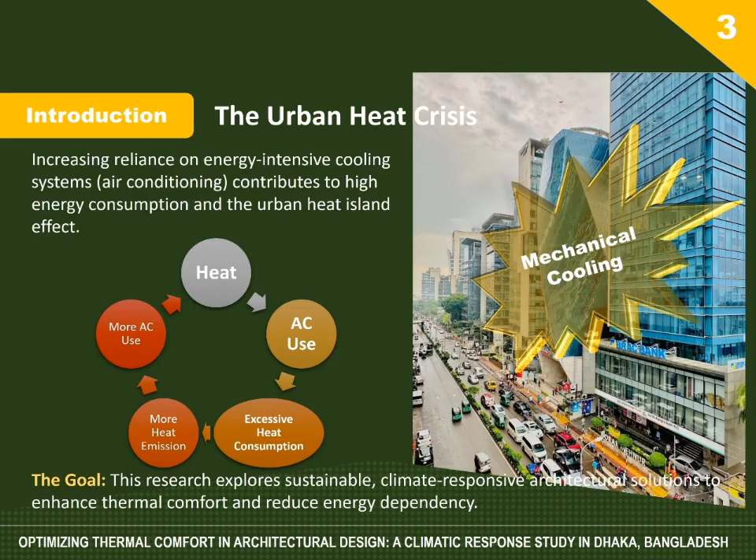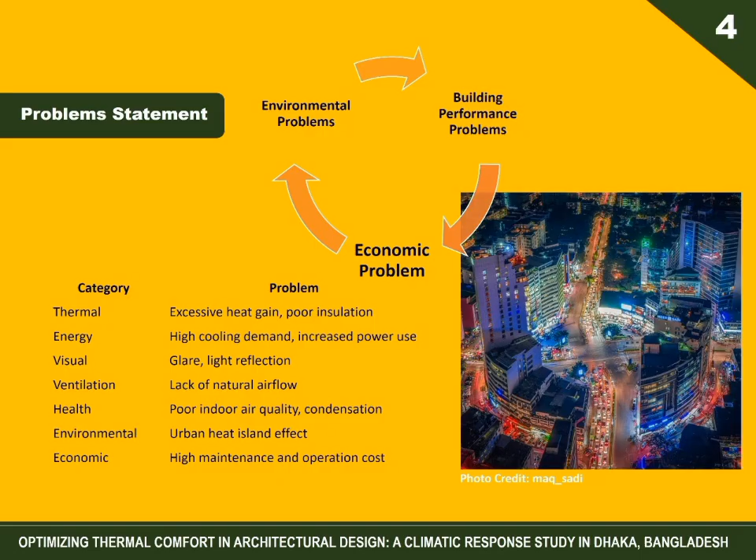Our research objectives are: identify thermal comfort challenges in Dhaka's urban buildings, evaluate passive design strategies and innovative technologies, and develop climate responsive design guidelines. Here are the key characteristics of Dhaka's comfort zone. Temperature: in hot and humid seasons, the comfort temperatures are 26 degrees Celsius to 32 degrees Celsius. In the cooler months, it is 20 degrees Celsius to 26 degrees Celsius. Humidity of 40% to 70% is comfortable. Air movement 0.5 to 1.5 meters per second.

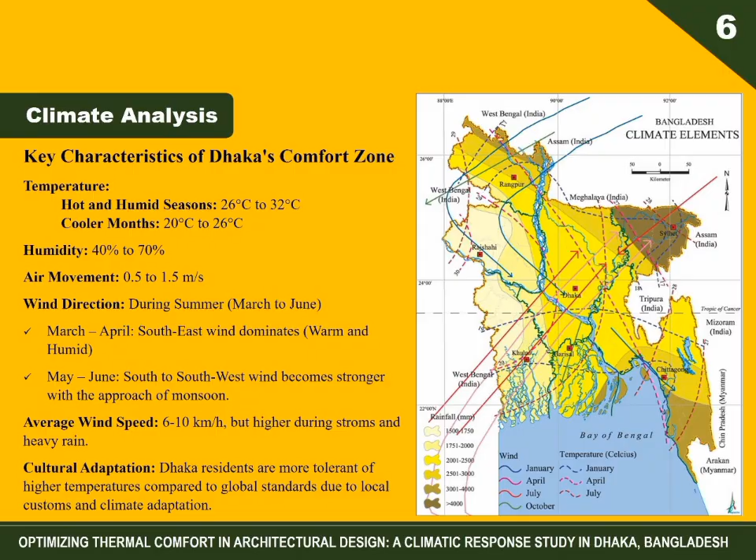During summertime, for wind direction, from March to April the southeast wind dominates, and from May to June the south to southwest wind becomes stronger with the approach of monsoon. The average wind speed in these months is 6 to 10 km per hour, but higher during storms and heavy rain. The residents of Dhaka are more tolerant of higher temperatures compared to global standards due to local customs and climate adaptation.

Fanger's model explains thermal comfort as a balance between heat produced by the human body and heat lost to the surrounding environment. It considers six key factors: air temperature, humidity, air velocity, mean radiant temperature, metabolic rate, and clothing. From these, two important indicators are calculated: PMV or predicted mean vote, which measures how hot or cold people feel, and PPD or predicted percentage of dissatisfied, which estimates how many people will be uncomfortable. The adaptive thermal comfort model is particularly relevant for Dhaka. Here, many buildings depend on natural ventilation. Bioclimatic design principles are the most significant factors to optimizing the thermal comfort in the building.

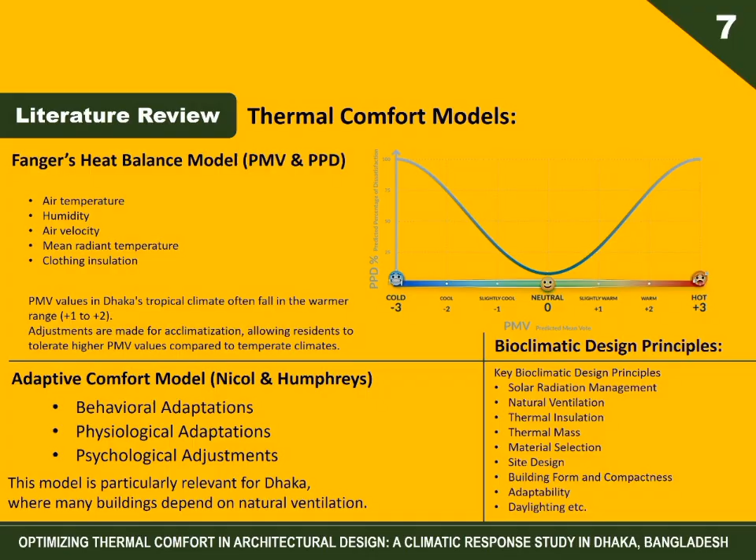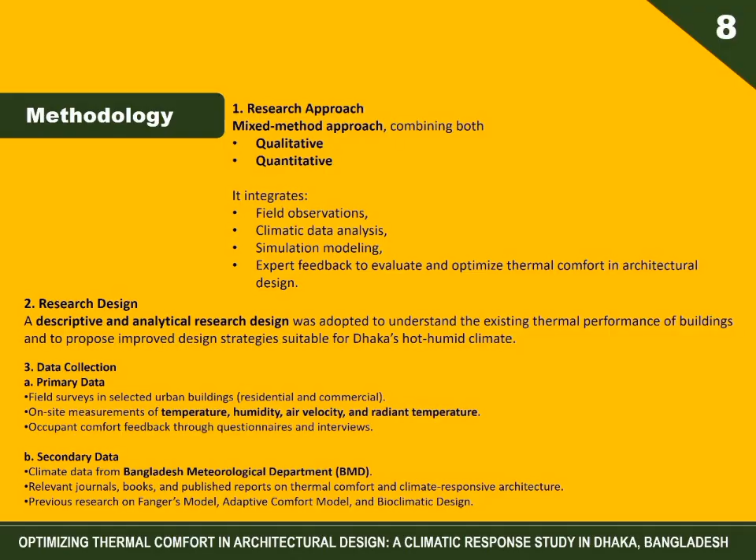Our research approach is a mixed method approach combining both qualitative and quantitative. It integrates field observation, climatic data analysis, simulation modeling, and expert feedback. A descriptive and analytical research design was adopted to understand the existing thermal performance of buildings. Data collection: we collected both primary data and secondary data. We use SketchUp as simulation software, PMV and PPD as comfort indices, and descriptive and comparative methods were applied to evaluate data consistency and results.

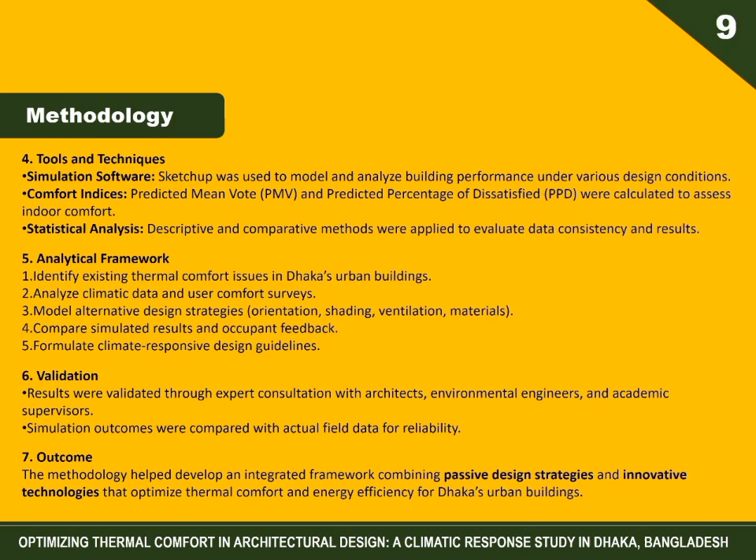Analytical framework: identify existing thermal comfort issues in Dhaka's urban buildings, analyze climatic data and comfort user surveys, model alternative design strategies, compare simulated results and occupant feedback, formulate climate responsive design guidelines. Results were validated through expert consultation. Simulation outcomes were compared with actual field data for reliability. The methodology helped develop an integrated framework combining passive design strategies and innovative technologies.

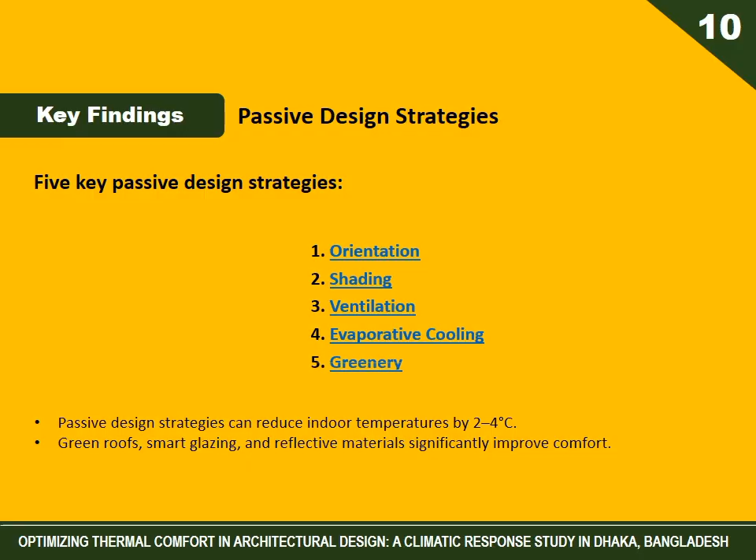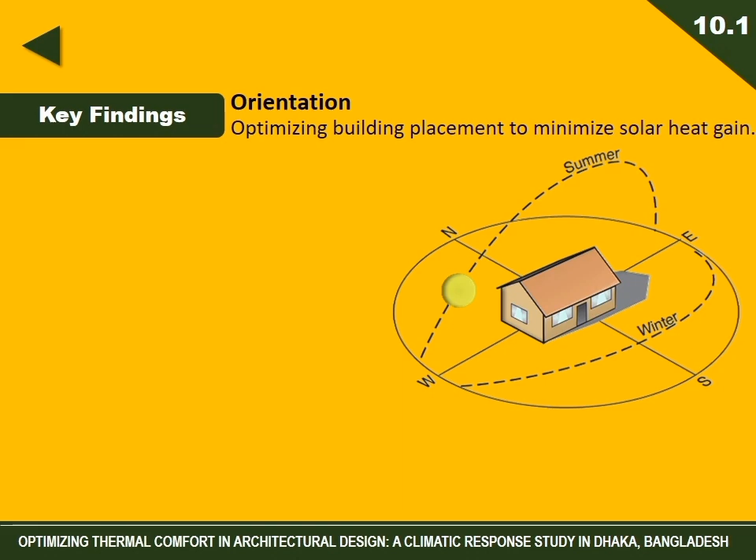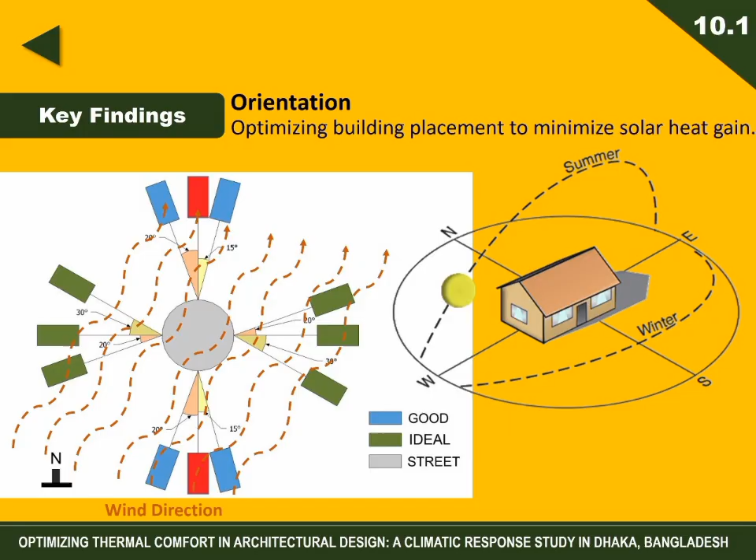Passive design strategies are based mainly on five key factors, that is orientation, shading, ventilation, evaporative cooling, and greenery. Building orientation plays a vital role in maintaining thermal comfort. In this context, the sun's path aligns with the prevailing wind direction during summertime. The diagram here illustrates the appropriate orientation of the building, which optimizes both natural airflow and solar radiation for improved indoor comfort and energy efficiency.

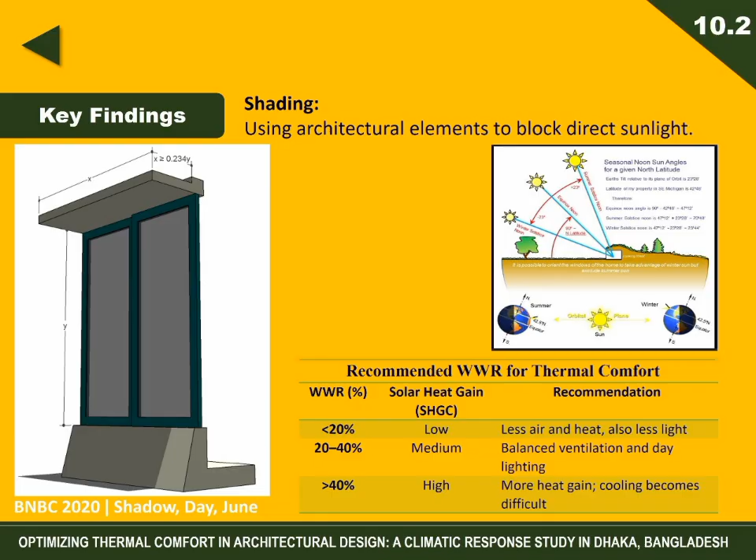Shading plays a crucial role in maintaining thermal comfort. Throughout the year, the angle of solar radiation changes, striking the building facade at different inclinations. Therefore, the window to wall ratio becomes an important design factor in controlling heat gain. The Bangladesh National Building Code, BNBC, also provides specific guidelines regarding shading and facade design to ensure better thermal performance.

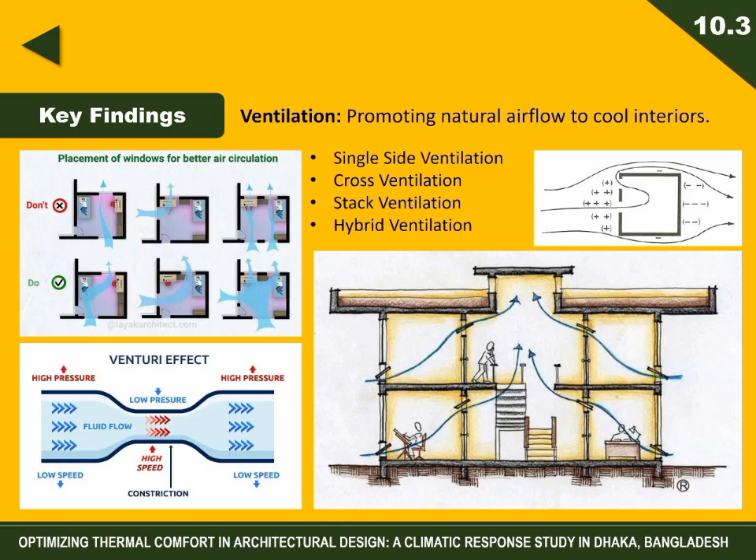Various ventilation strategies play a significant role in improving thermal comfort, such as single-sided ventilation, cross ventilation, stack ventilation, and hybrid ventilation systems. Among these, stack ventilation is the most effective natural method, where warm air rises and escapes through upper openings, allowing cooler air to enter from the lower openings, thereby maintaining a comfortable indoor environment. Evaporative cooling lowers air temperature by using the natural process of water evaporation, where heat from the air is absorbed to convert water into vapor. It is an energy efficient and eco friendly method suitable for warm and dry climates.

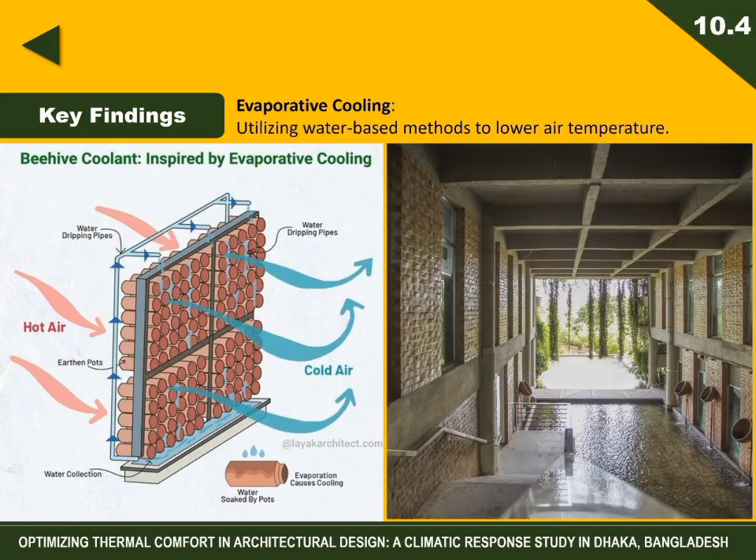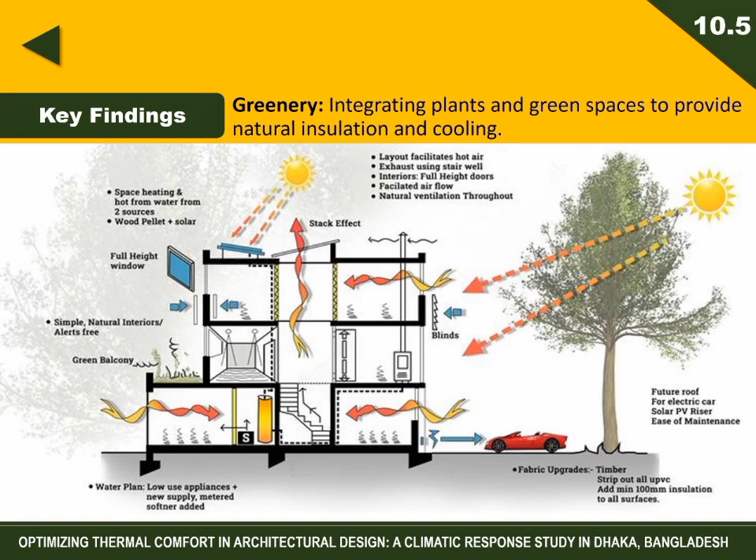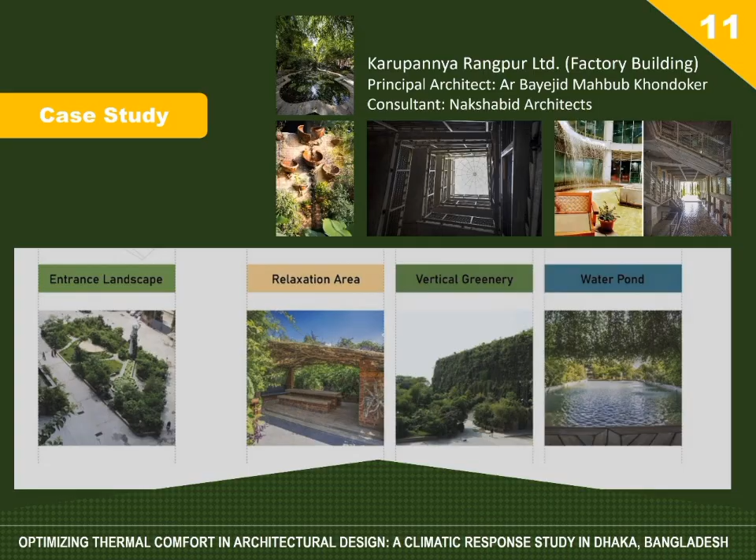Greenery helps improve thermal comfort by reducing heat through shading and evapotranspiration. Plants on roofs, walls, and surrounding areas lower surface temperatures and enhance the overall microclimate sustainability. Our case study is Karupannya Rangpur Limited, a factory building designed by Nakshabid Architects under the leadership of architect Bayejid Mahbub Khondoker. This project creates an eco friendly ecosystem. The design thoughtfully integrates passive design strategies, natural ventilation, daylighting, and locally sourced materials, which together enhance thermal comfort and energy efficiency, resulting in a sustainable and climate responsive environment.

So here, first, a comprehensive analysis identified the thermal comfort challenges. Second, the study thoroughly evaluated various passive design strategies and innovative technologies, demonstrating their potential effectiveness in mitigating heat stress and reducing reliance on mechanical cooling. Finally, integrating the findings from these evaluations led to the development of climate responsive design guidelines.